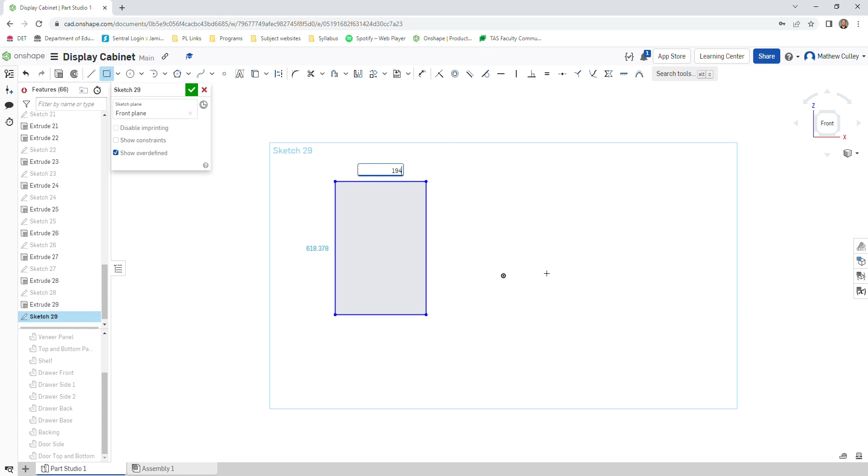We're just going to draw a basic veneer panel that can go inside your door frame. G for corner rectangle, left click and drag. Your panel is going to be 194 millimeters wide by 239 millimeters high. We can then extrude that

3 millimeters. Done. Right click on part 16 and rename Door Panel.

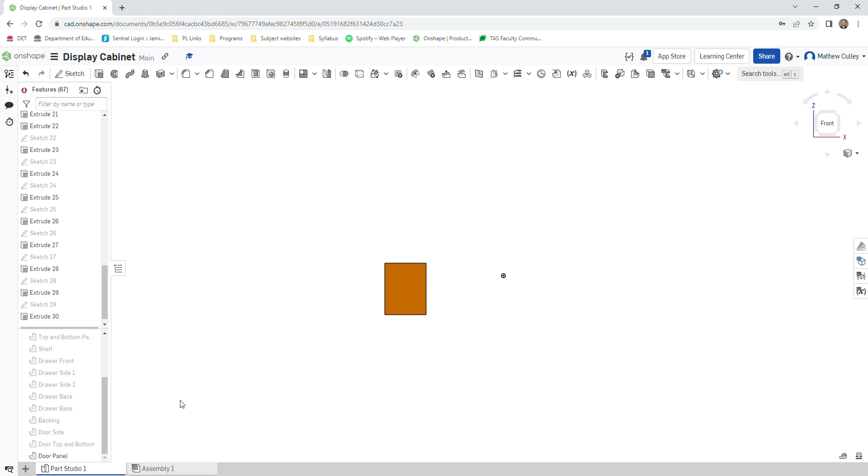Just going to jump over to the assembly studio now, and we can start to assemble our door. So insert, we need one door side, a second door side, a door top, need two of those, and we need a panel. We will solve that.

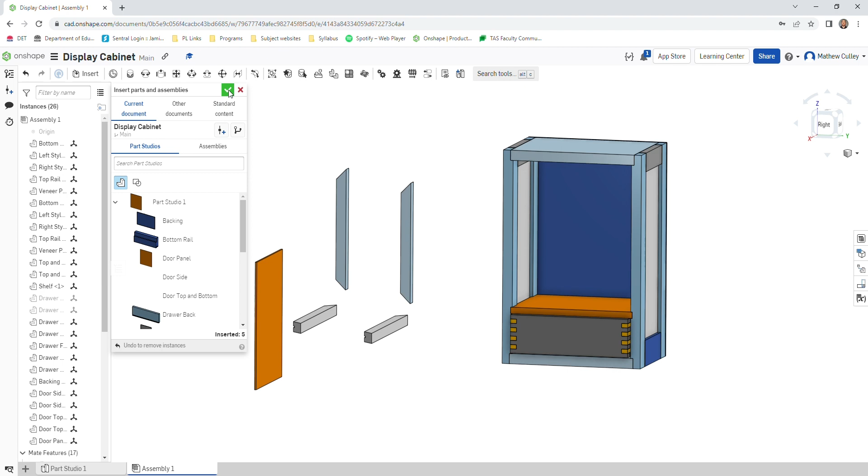Okay, and then now we can start to construct our door. So before I begin, I'm just going to rotate these parts to the way that I want them. So 90 degrees, and I'll just spin that one around 180.

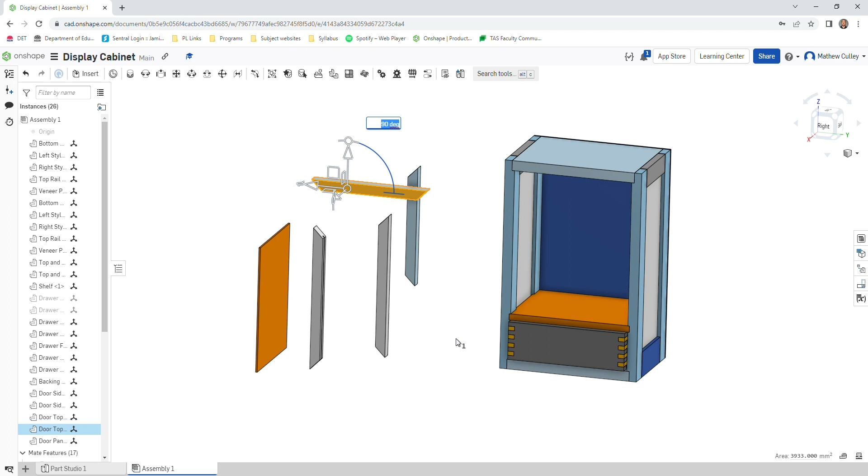Done. This one here, rotate 90 degrees. Done. 90 and 90 and 90 again. Just drag that panel out of the way for a second. Drag this down here.

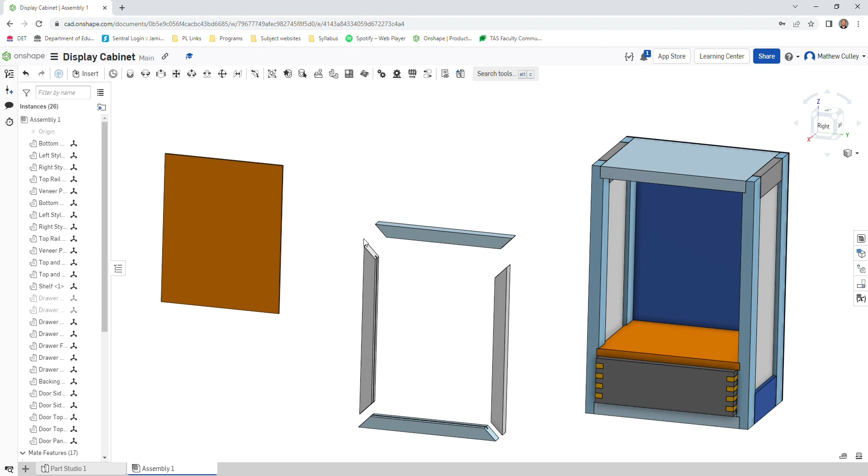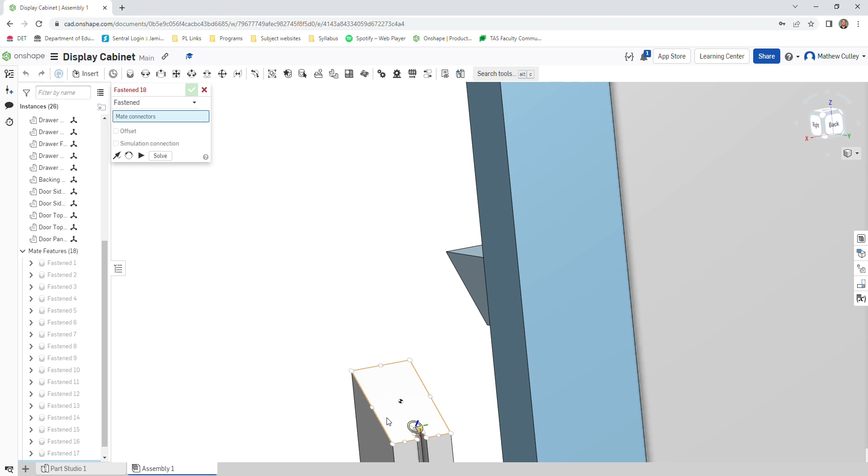Okay, and we're just fastening mate all these panels. So F for fasten mate, come in, just going to grab this corner here. We have our blue axis pointing across the top there. Left click, get our blue axis going the same way for this corner, so it needs to be running along. There we go. Left click again, and we have our two pieces connected there. Solve that.

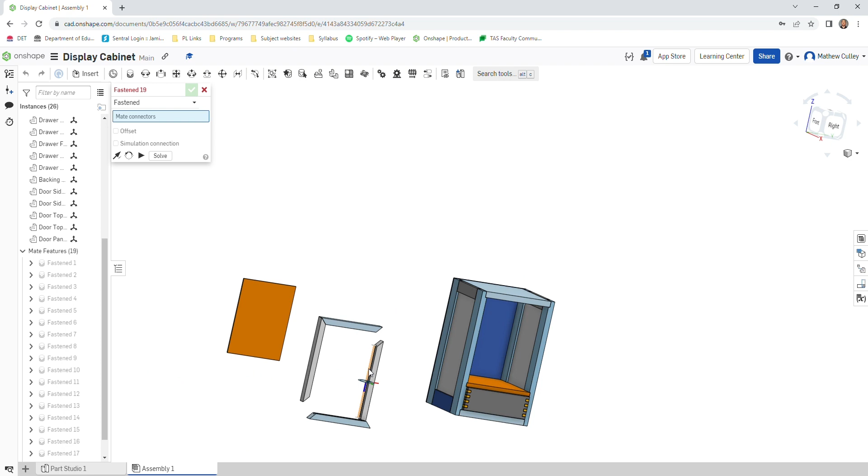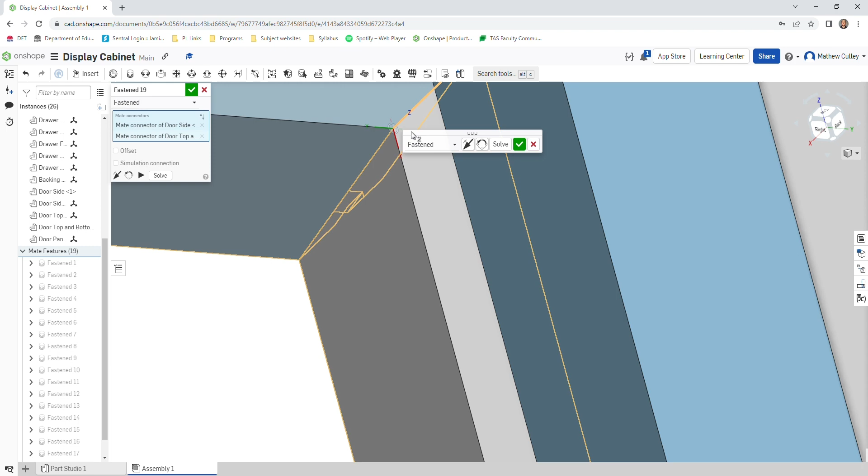Come in, get my blue axis pointing across the top. Left click. Okay, again, same here, pointing across the top. Left click and solve that. Okay, you can see our door frame starting to come together.

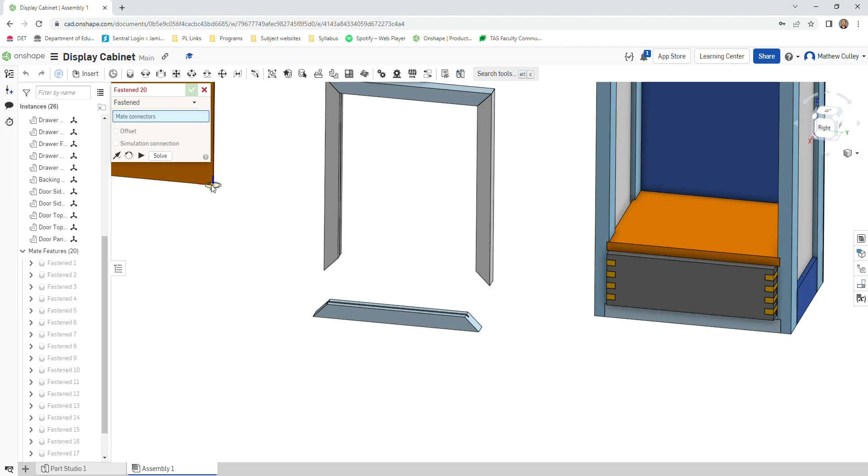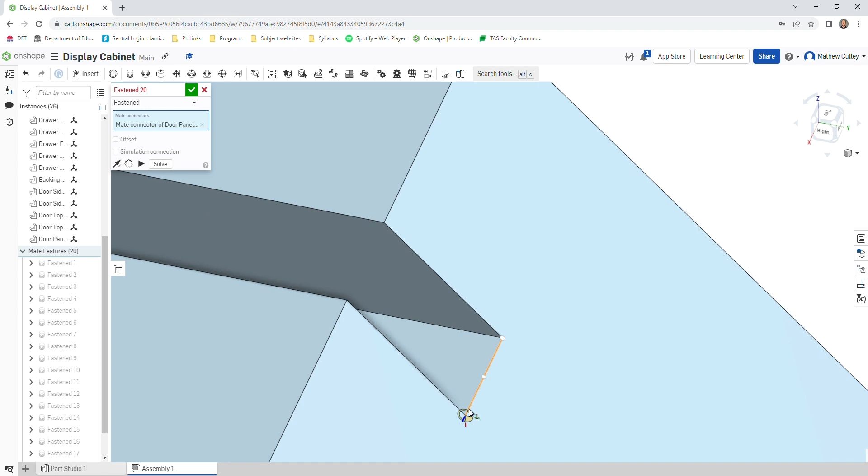Okay, before we go any further, we want to get our veneer panel in. So come down here, left click, blue axis pointing up on that corner. We're going to insert it into there. Blue axis pointing up if we can. Zoom out.

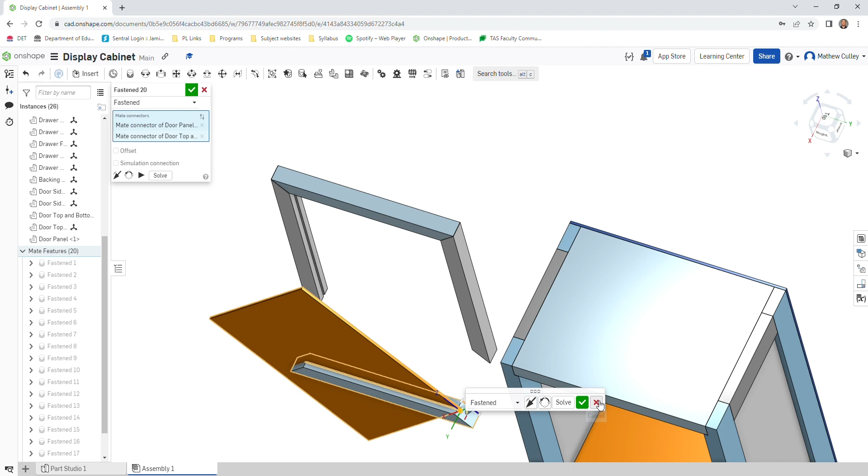Okay, now it's orientated it on the angle because of our miter here. So we'll just undo that. And another way that we can do it

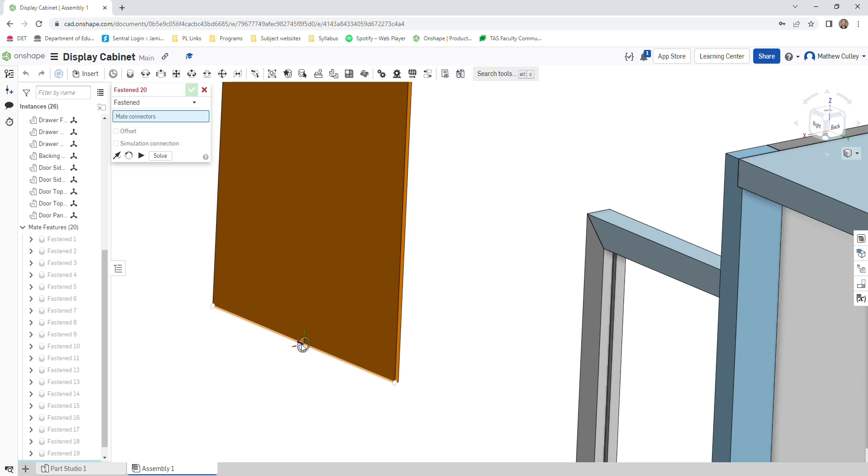is if we go back to our fasten mate, come into this bottom edge here. We've got our blue axis, it's running along that edge. It's from the center point. And we're just going to come in down into here, blue edge running along, left click.

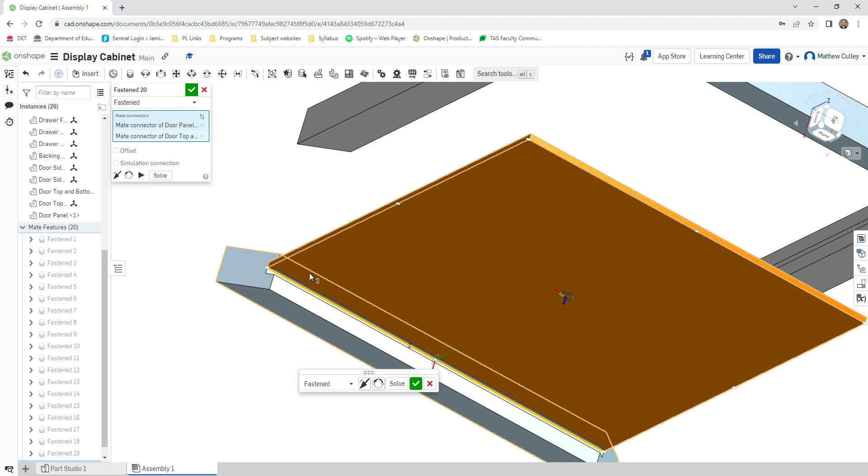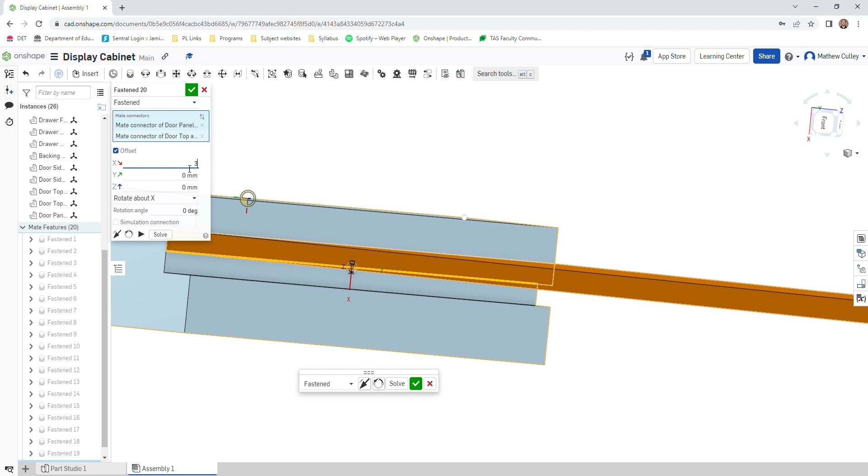Okay, now it hasn't quite got it into the housing, but what we can do from there is use our offset tool. So if I just left click and check that box, I want to offset on the x-axis, and it's the thickness of the panel, which is 3 millimeters. So if I just go up here, type in 3, hit enter, you can see how it shifts the panel down into the housing where it should be.

Okay, so I can now solve that. I'm happy with that. Okay, and I'll just orientate us back around the right way so it starts to make more sense. Zoom out, and we'll just finish off by connecting these two together here.

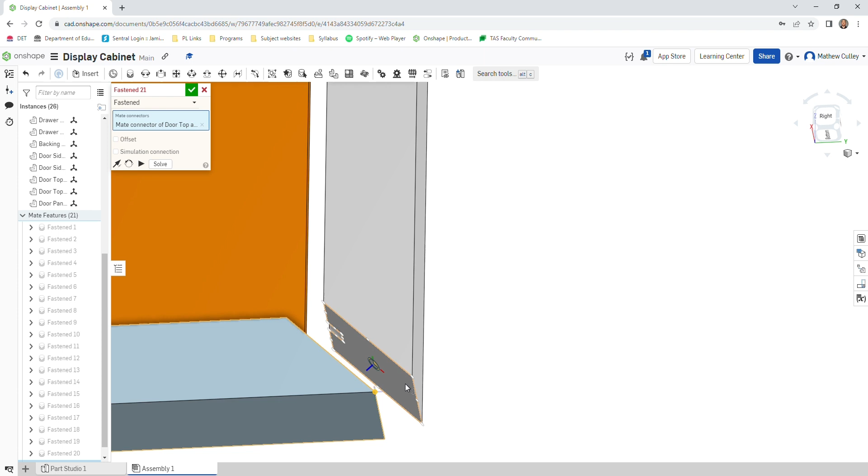Fasten mate. Got my corner pointing out, and that's pointing out as well. Solve that. Okay, and we now have our basic door all done, fit together. So using

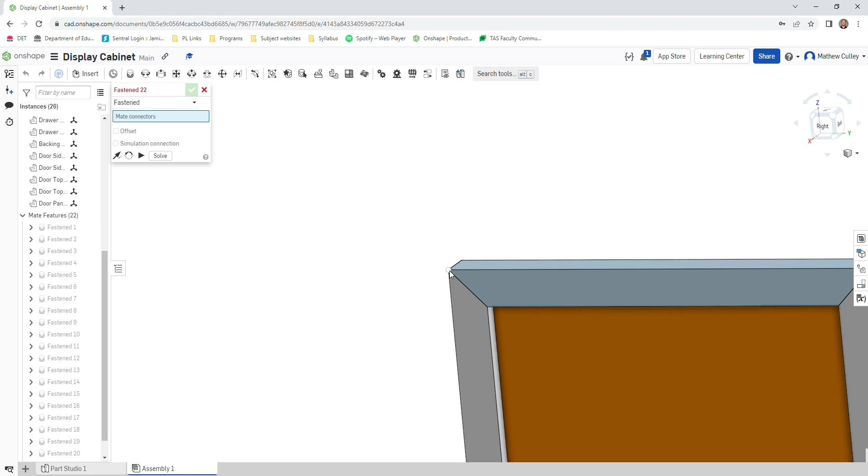that offset tool, remembering that we have a 2 millimeter gap all the way around for our door, if I just grab this corner here, blue axis pointing in, okay, and we'll pop that up into here.

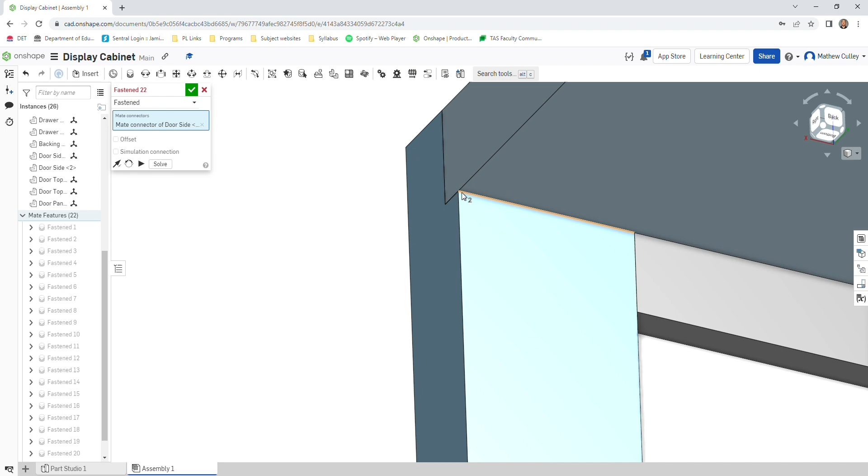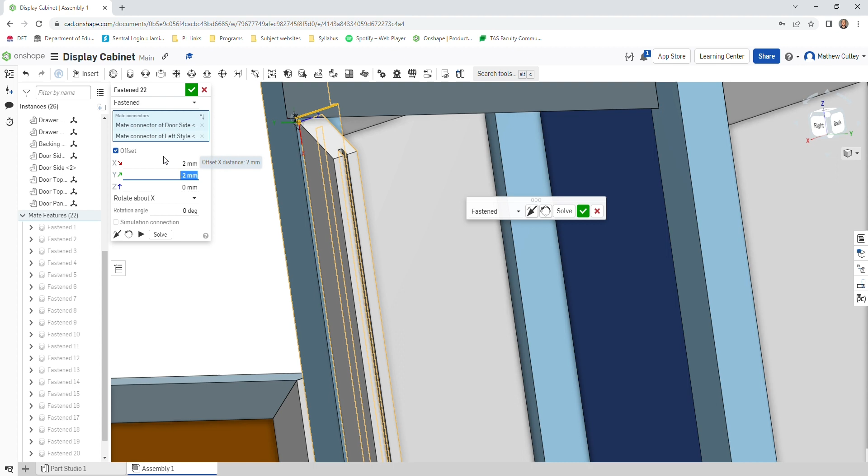Okay, but remembering we want to offset. So we're going to offset on our x-axis 2 millimeters, and our y-axis is going to be -2 because we want it to go the opposite way to this green axis here. So I'm just going to set it off, solve that, and there is our door perfectly in position with a 2 millimeter gap all the way around. Now that'll allow for your hinges to be mounted. Okay, but there is your display cabinet all complete.